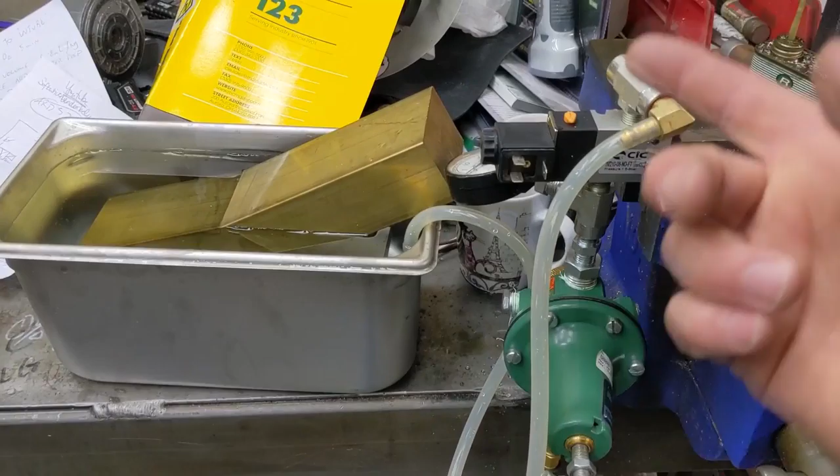A dirt simple mechanical ventilator that can service hundreds of patients at a time, made from three very simple components, tens of dozens of which are sitting on every industrial supply house's shelves the world over at this very moment. What are we waiting for?

Well, like I said, I ain't no gynecologist, but I'll take a look.

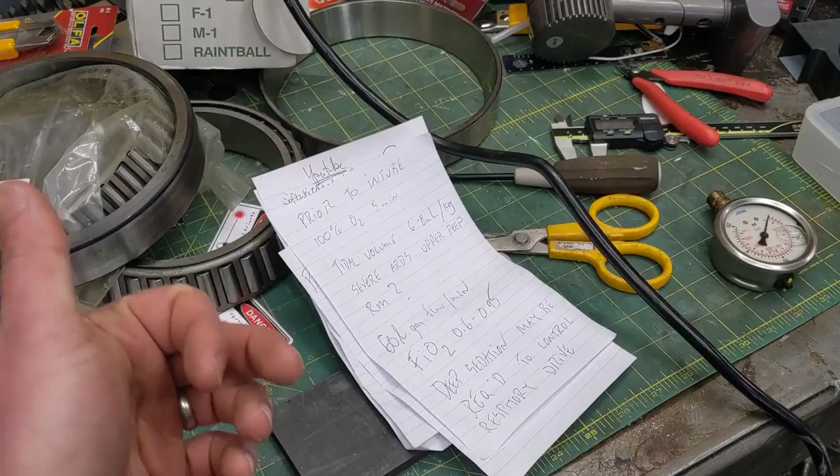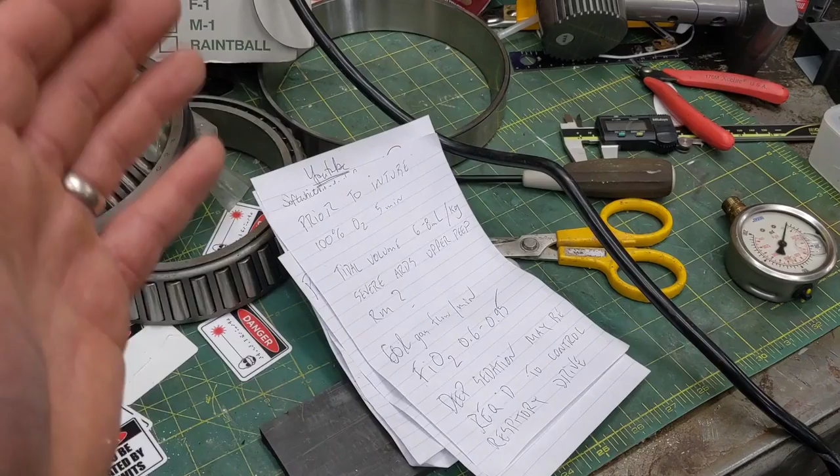I couldn't sleep last night, so I set to thinking. I saw the talking heads on the Confuser saying that what we're missing is ventilators. Now, ventilators, that's a technical problem, and technical problems, that's how we do. So that is an industrial bottleneck, apparently. They can't get enough ventilators.

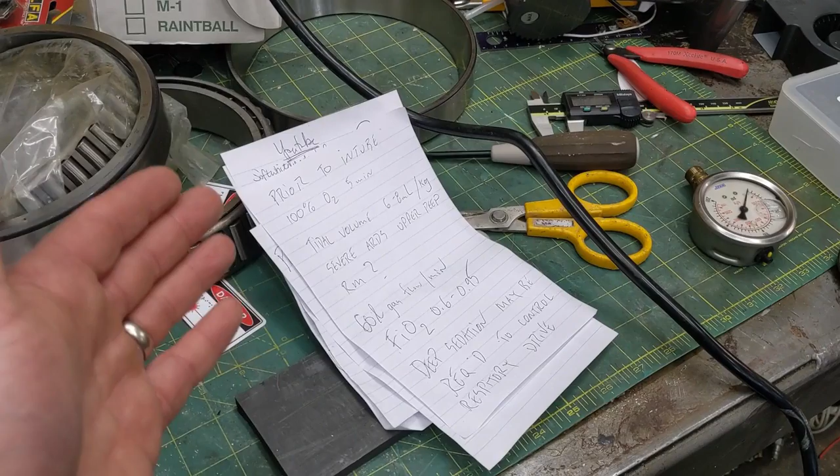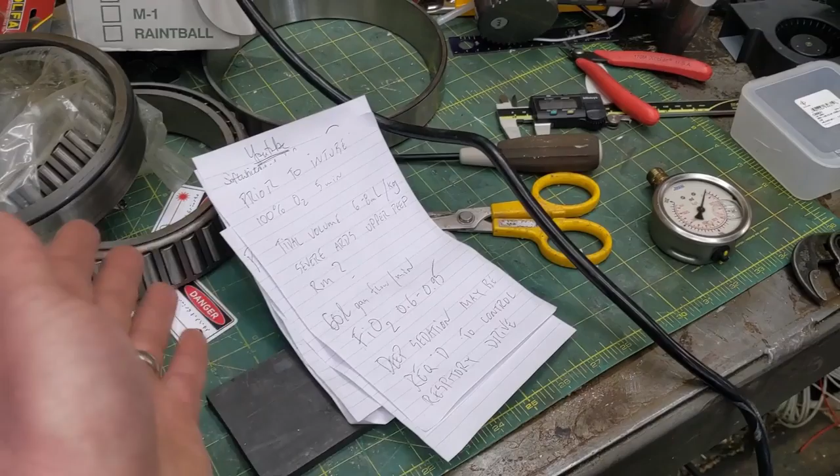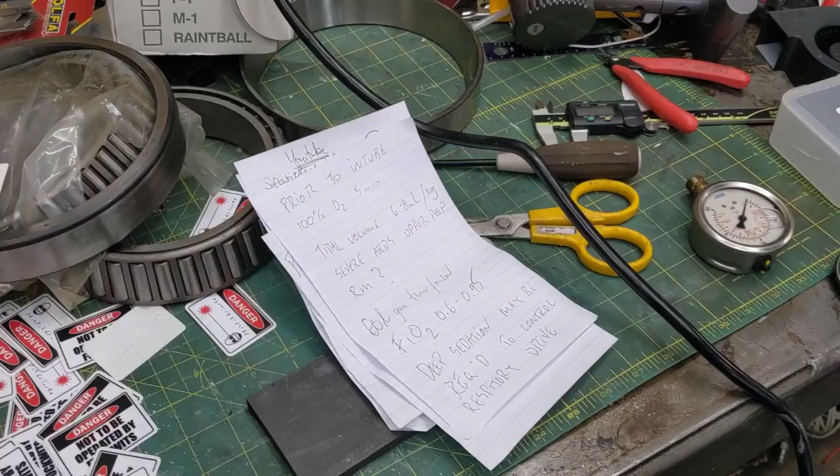Now, whether or not that's just the party line, and if we solve that bottleneck they just move on to the next bottleneck, which, if you've worked in mining or heavy industry, essentially all you're doing is hitting the next bottleneck until it's not economically viable, you know? But in any case, one thing I've been seeing from the open source community is a lot of hand ventilators turned into automagic ventilators. Now, that's great and all.

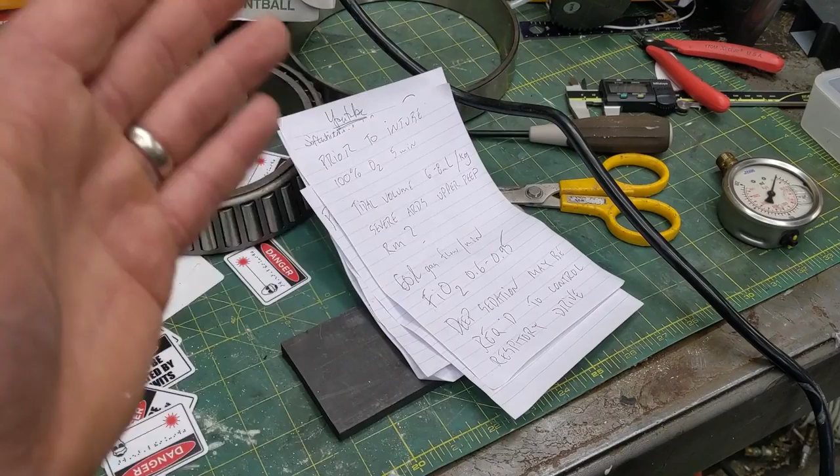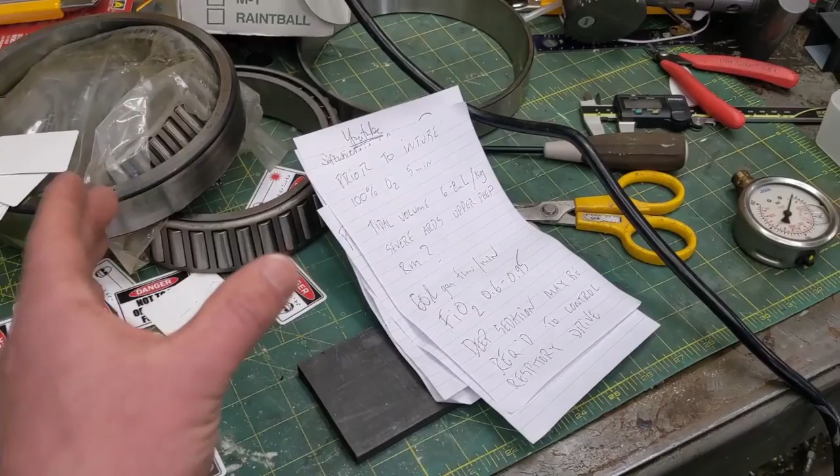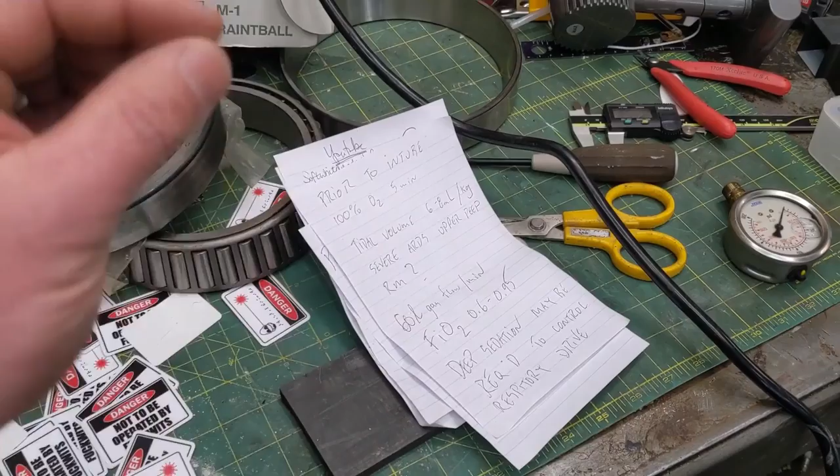However, if you have, say, a life-giving milkshake and you queue people up, you make the milkshake, you give them the milkshake, they sip it, and then they're better. If you have a long enough queue, you no longer want to be making the milkshakes one by each. You'll want to make them in a big old jug, a big old bucket, and give everybody a long straw. So this is my idea, and fewer moving parts.

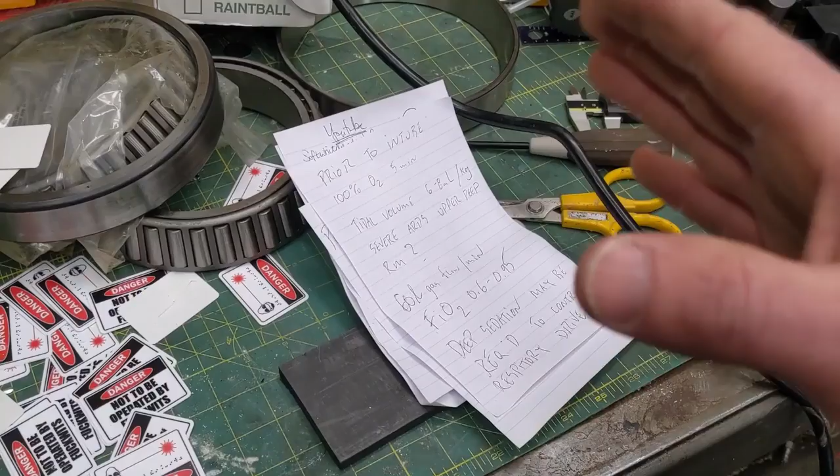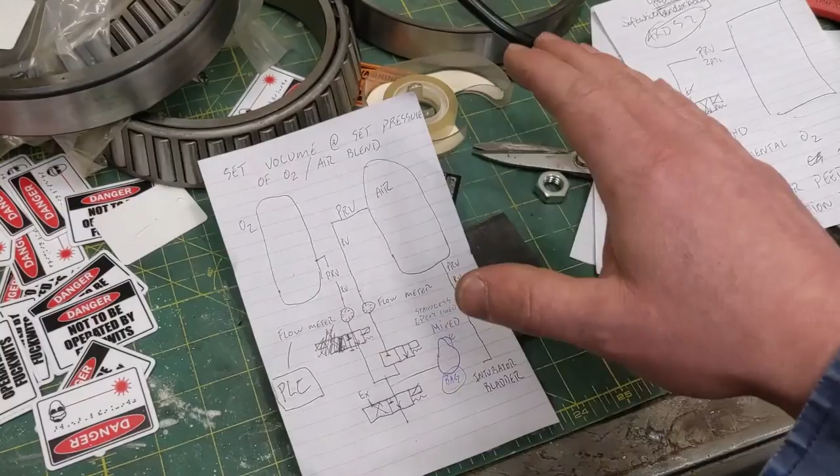A lot of these ventilators they're making, cobbled together, tons of moving parts. We don't want that. Fewer moving parts, keep it simple, stupid. I think it was either Ray Kroc or Einstein who said, make it only as simple as it needs to be, but no simpler. So the simplest thing I can come up with, and I'm tapping into Cunningham's law, in that the way to get a good answer on the internet is not to post a question, but to post the wrong answer. All of the components on here are completely ubiquitous throughout industry and very easily maintained by anyone with a modicum of technical knowledge.

So you move on here, we get ventilation down. Well, now we're into staffing issues where we need more technical people; within 30 minutes of running this system they will have it down. You have them volunteer, as long as you have protocols in place in the hospital or the field tent or the parachute inflated with a Herman Nelson. You're chasing bottlenecks at this point.

So what we do is we have an air compressor, and we want a special kind of air compressor, a scroll compressor, because there's no oil in the airstream. If you have a screw compressor, then you have to remove the oil from the flow. You don't want that going into people's lungs. You could also do a reciprocating one if you needed to. So you get a big receptacle at 120 PSI.

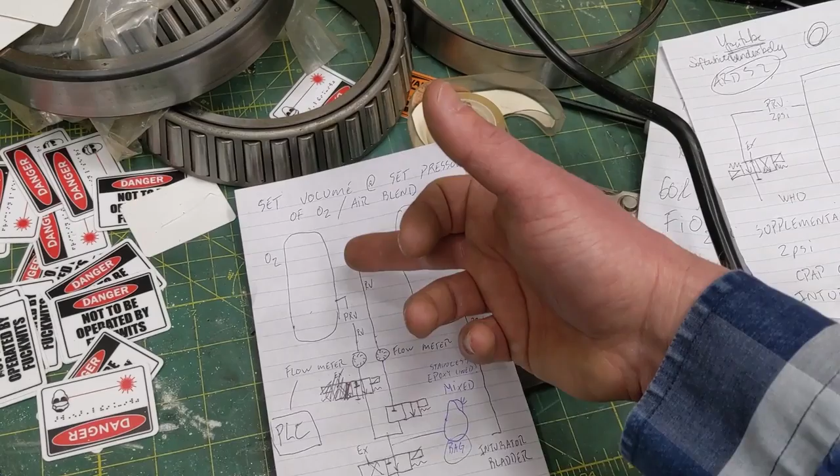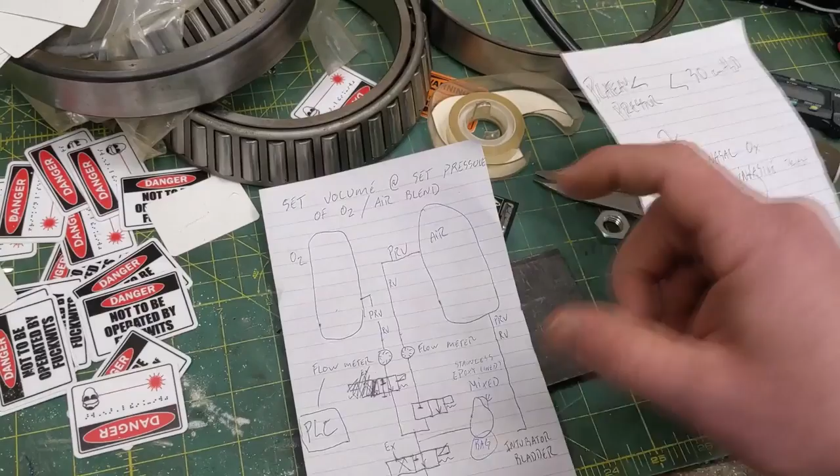Now, that's far too much for a human lung. So you have a pressure-reducing valve. A pressure-reducing valve, as opposed to a relief valve, reduces the pressure downstream. So you set this up to whatever the lung capacity is, 30 centimeters of H2O pressure. That's about half a PSI. Now, all this information I gleaned came from the WHO website.

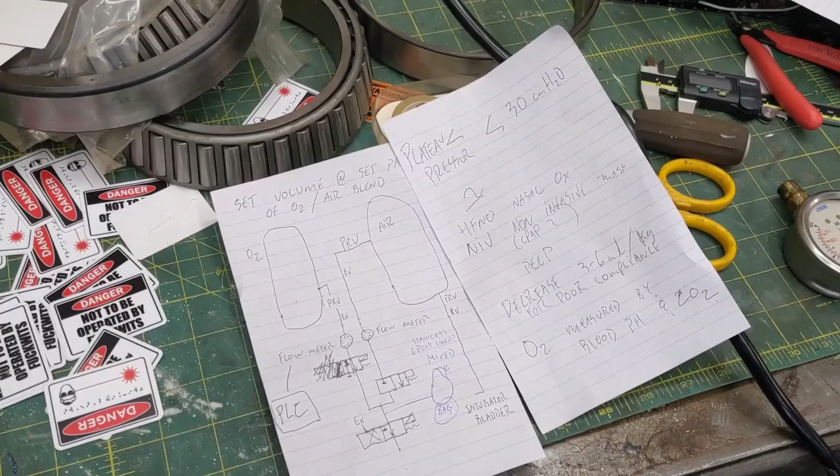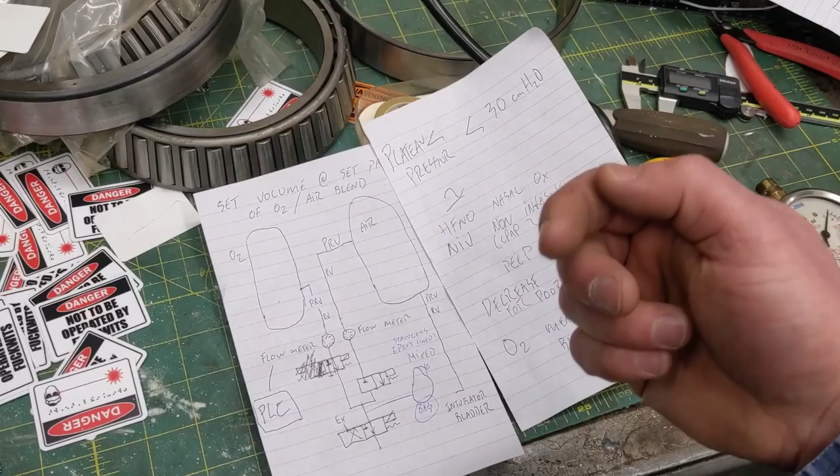There's a PDF on how to treat the victims of this virus if they have complications and need to be put on respirators. Also, the respirators they're generally going to be using are not the CPAP type that just fit over the face. They are going to be intubated. There's a number of ways. They can go through your nose, they can go through your mouth and down your throat. They got that J-hook looking thing that goes right in there. You got to be sedated.

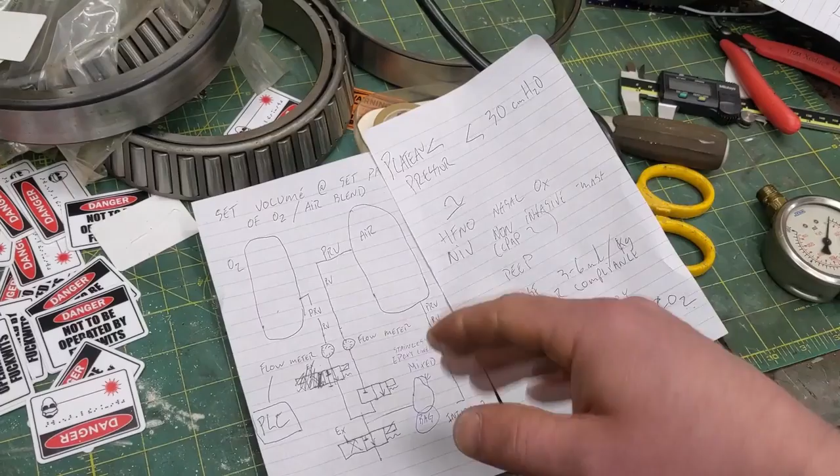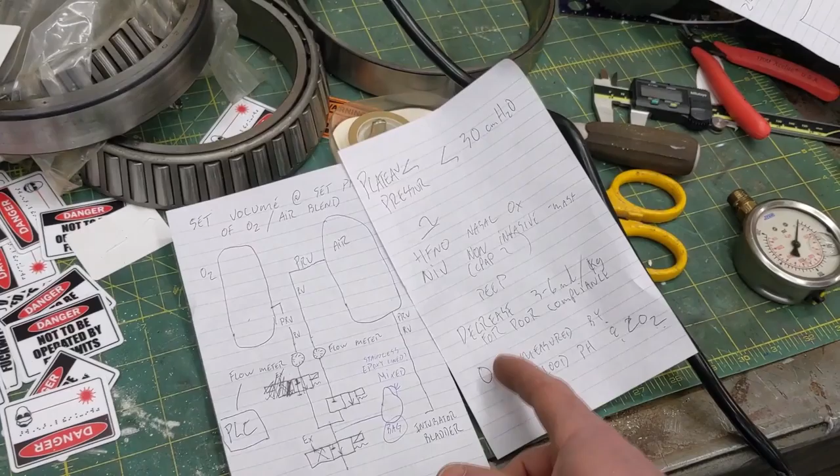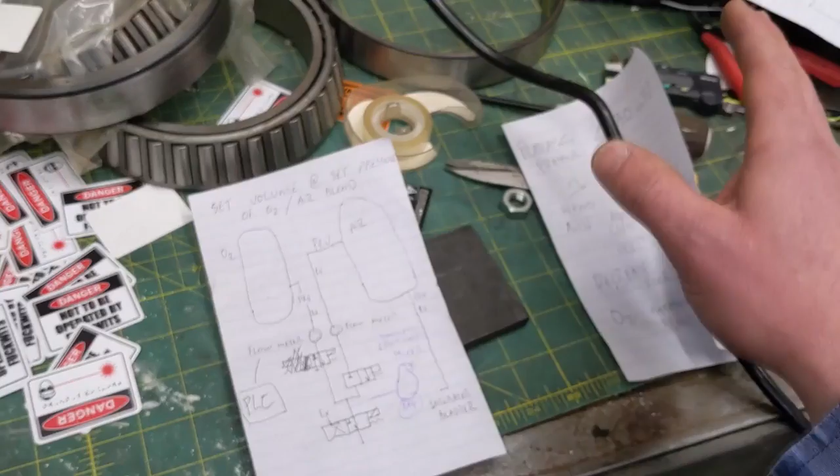It's fucking nasty. And they also have an intubator that goes down, and then a bag inflates below your vocal cords. That seems pretty uncomfortable to me, but that bag inflating also needs some air. Here's the thing, what's missing with most of the DIY solutions I've seen is that there's no additional oxygen. If the patient is that bad, they need additional oxygen. So this system allows you to have hundreds of patients hooked up very quickly and have additional oxygen.

As I was saying, we have a pressure reducing valve down to 0.5 PSI. We have a relief valve. We don't need that relief valve unless we're intubating, because the CPAP mask will just come off the face if the pressure spikes. We have a flow meter here for closed loop control.

You wouldn't actually need this if push comes to shove. So what we have is a bog standard zero pressure solenoid valve. Now, a zero pressure valve is special. It's a little bit special. You can get those ASCO Red Hat valves that are zero pressure from McMaster-Carr. I'll pull out the Bible and show you.

In Tom Sachs we trust. I have very few items I'm particularly attached to, but this might be... you'll excuse me for partaking in some McMasturbation. Also good for sitting at home during these troubling times. I don't think it's the stuff you're prepared for what's going to get you. It's the stuff you're not prepared for what's going to get you. We're reasonably prepared. Reasonably.

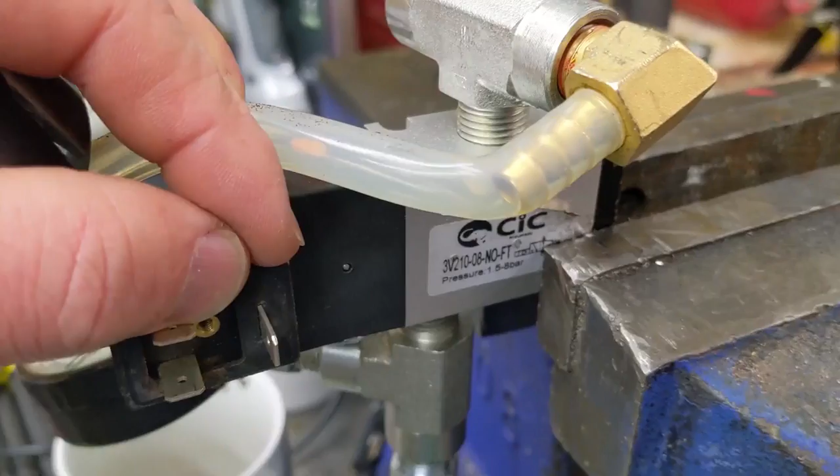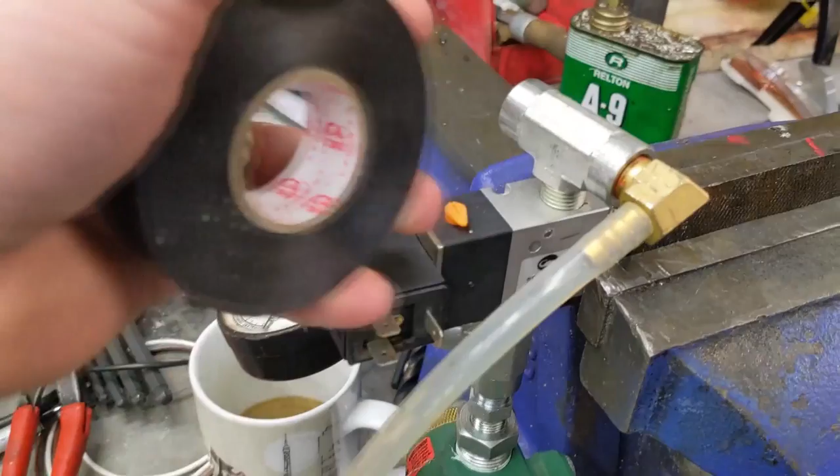Here's the proof of concept arrangement. PRV, industrial pressure reducing valve, good name brand, not janky. And a janky valve, what will not work for us, as indicated by the lowest pressure rating, 1.5 bar. That's 20 PSI, blow you right up like a balloon. And of course the valve does not exhaust, so I'm using my fingy to supplement that exhaust valve.

If this works, this is something that any industrial anybody really could make. An electrical supplier, plumbing supplier, HVAC supplier, anybody could make and babysit this system. We got the patient intubated in this cutting edge medical sciencery. You can tell by the stainless. Now very careful in here. We're going to increase the pressure. There we have flow. I'll close this and the bag will inflate. Drop it and the bag will deflate.

A little weight isn't doing it for me. It's inflating and floating up, and then it doesn't retract, or it doesn't expel the gas. What would you call that? Exhume, expectorate, breathe out, exhale. Jesus rice. It's like this guy's just some random bumblefuck in his own garage.

Inflate, oh. Overinflated the lung. I guess that, well, no, this would be a PC, pressure comp. No, PC. Pressure, or PV. I don't know, there's a term for it. There's AC and PV. So this would be pressure ventilated. You wouldn't get anything over half a PSI. There we go. Huh? Easy peasy lemon squeezy.

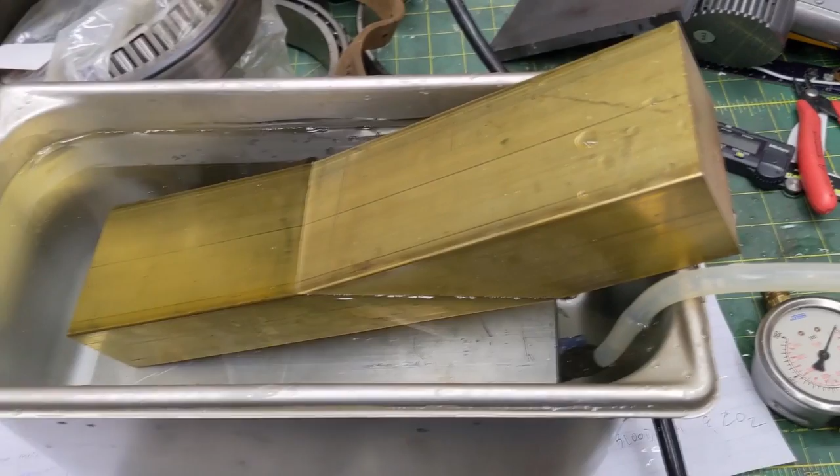Yeah, so ventilator of last resort. Couple of valves. Compressor in a tank. Now we have a patient with a slightly less compliant lung, maybe older. Heavy smoker. Lives in pollution. Still working. Get a different angle on that. If the only option was this or death, would you take it?

These could be manufactured quick, fast, in a hurry too, for hundreds of patients. Of course, you will run into a bottleneck of what's currently in the supply chain, being that the supply chain has essentially shut down. Still, I bet you there is a lot of valves kicking around industrial supply warehouses.